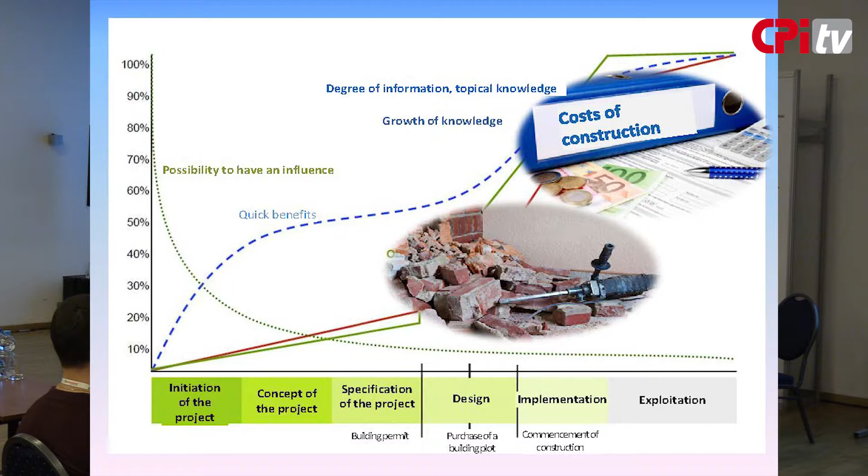We want to avoid very costly claims that arise when the buildings are already operating. We want to start with best practice issues, and we want to take responsibility at a very early stage of preparation of a precast product.

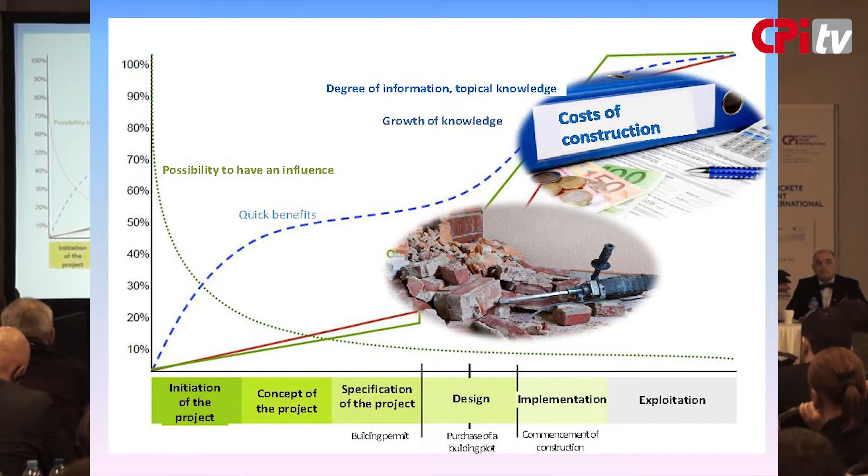We want to set rational thinking, ideas, and forward planning so as to design the precast elements properly. The planning is the most important issue for us in order to achieve the so-called quick wins, quick benefits. We have to start at a very early phase.

So, starting with the concept of a housing development, we need to set our thinking in the planning of the entire lifespan of a building. In our company, we have built around 3,000 houses within the last 15 years.

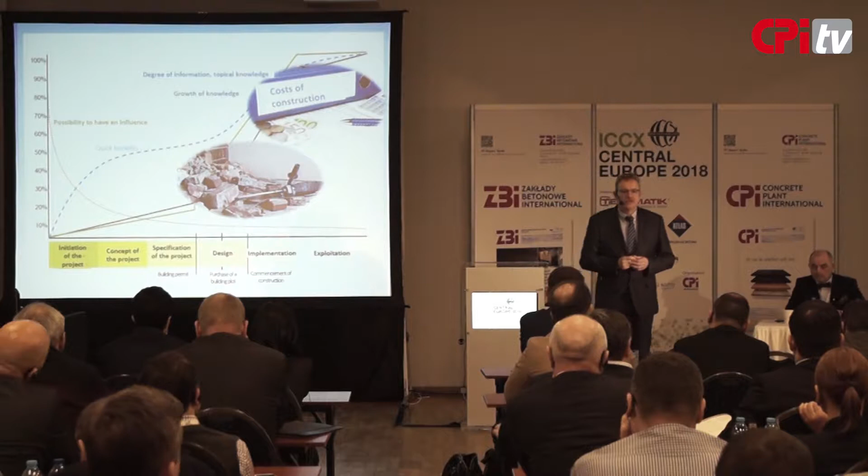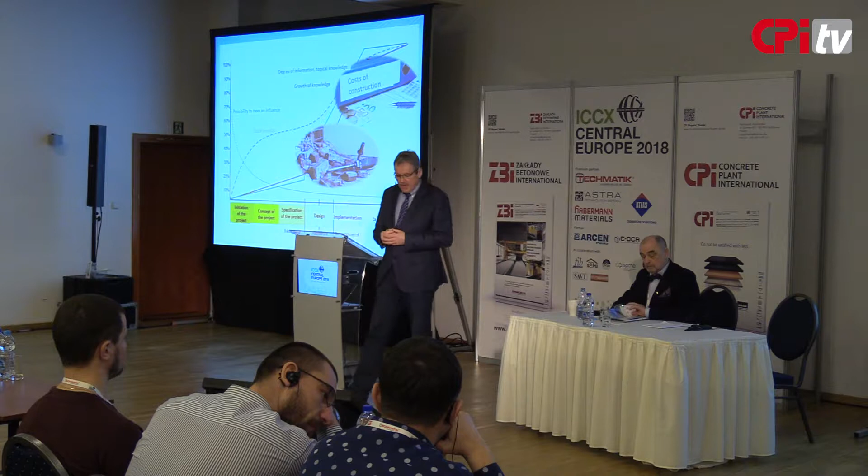And we know that the worst thing that can happen is when, during assembly, anything that has been omitted during the construction phase is discovered after it's been given away for operation. It is the most costly procedure. If we manage to eliminate that, it's going to be an enormous success.

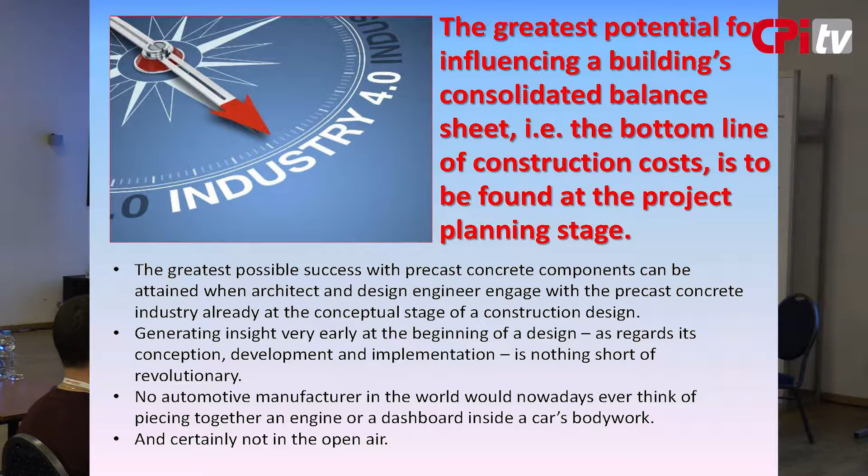On a normal construction site, for example in Germany, and I'm thinking about the construction of airports, you have to organize the construction work in a very detailed way. The elements that have been pre-manufactured are brought to the construction site and have to be appropriately stored. Per week we are assembling a certain amount of those products, and this has to be taken into consideration in the planning of the entire construction project during the design phase.

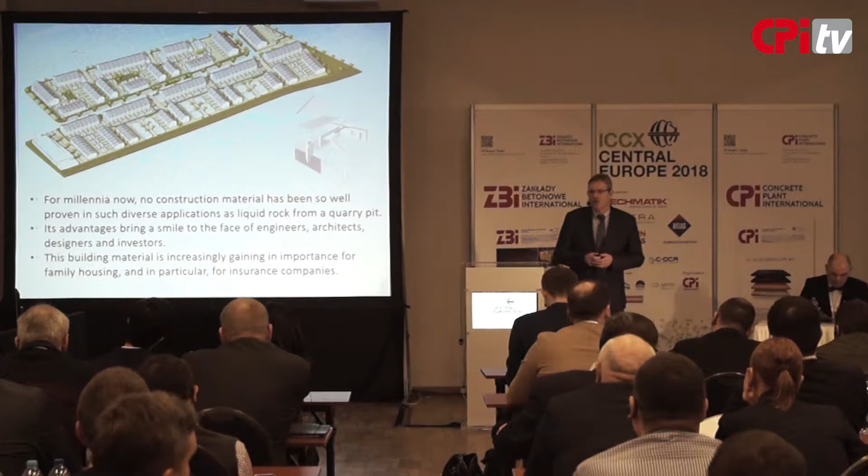Here you can see an example of a project with around 198 houses, and we had to plan the energy supply to those houses in advance. We had to plan it in a cost-efficient way.

Right now the people who live there give us a positive response concerning the savings, or the energy effectiveness, of those houses. That is, it needs very little energy to have it maintained per year.

What I'd like to add is that this project was situated around Frankfurt, and they are made of concrete. They have a functional division, and the massive elements made of concrete secure them from noise generated by the Frankfurt airport.

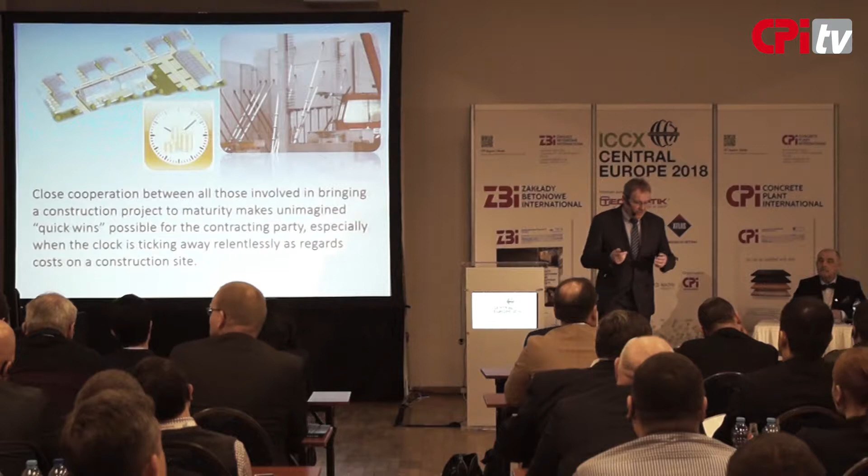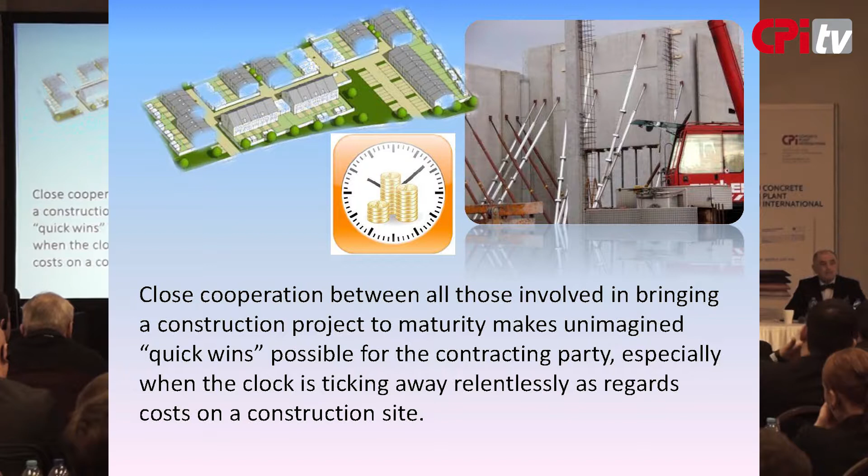Here you can see an example of a different building with a special assembly technique, and it is also something that influences the erection time severely. It has to be taken into consideration in the design phase as well.

I know that you are all already hungry and waiting for lunch, but let me say a few more words. You have to think about the Earth and how you treat our planet.

There was a period of fascination with liquid stone by the contractors and by the manufacturers. I am convinced that this material is a good one. I know that it's been used for the last 2,000 years, already in ancient Rome. I know that the Pantheon was made with the use of concrete without any reinforcement.

And this building has withstood several severe earthquakes and is still standing with practically no damage to its structure. So I am convinced that this material is useful also in the case of a need to assemble more installations in a project.

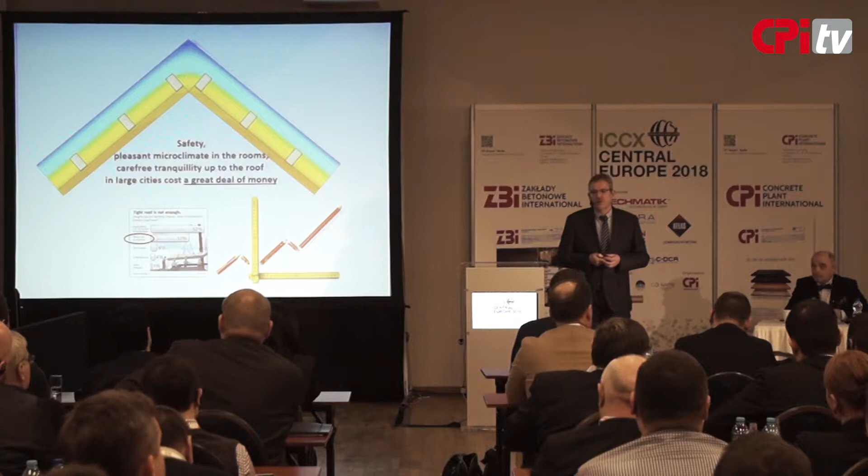The basic need of people is a safe home. Those homes have to be resistant to weather conditions. People are looking for safety, pleasant microclimate, and carefree tranquility in large cities, and they are ready to pay a lot of money for that.

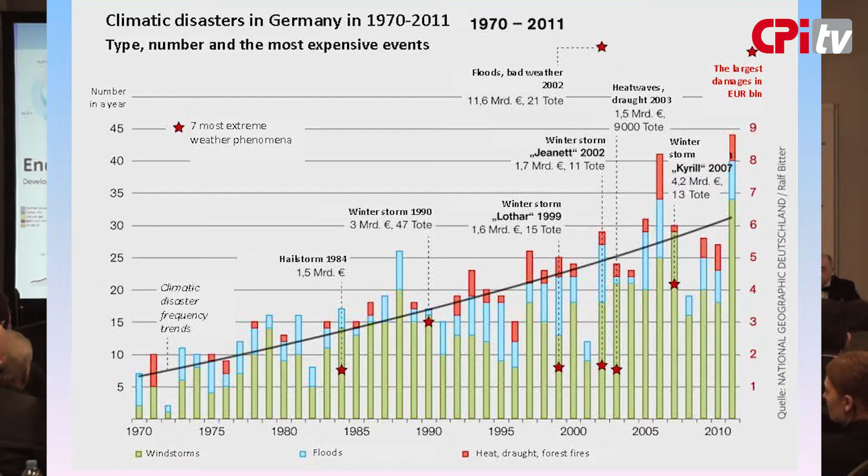Here you can see a graph on climatic disasters in Germany from the 70s up to 2011. Here you can see the energy use of mankind. As you can see, we use a lot of fossil fuels, and we generate huge problems with regard to this.

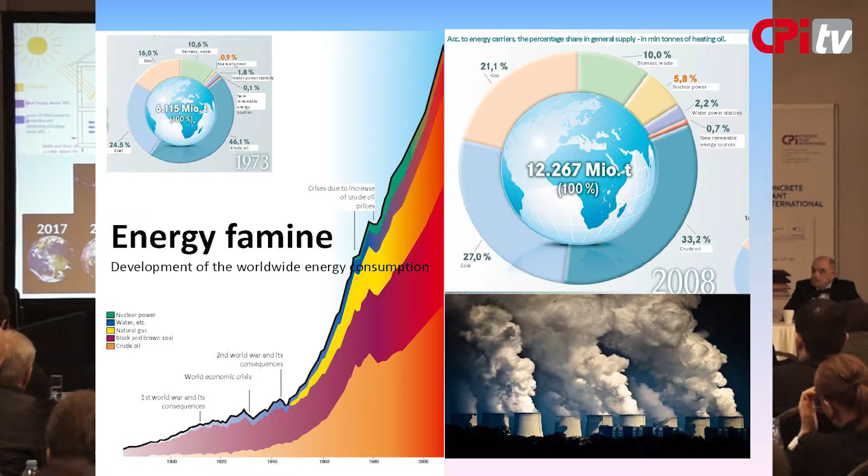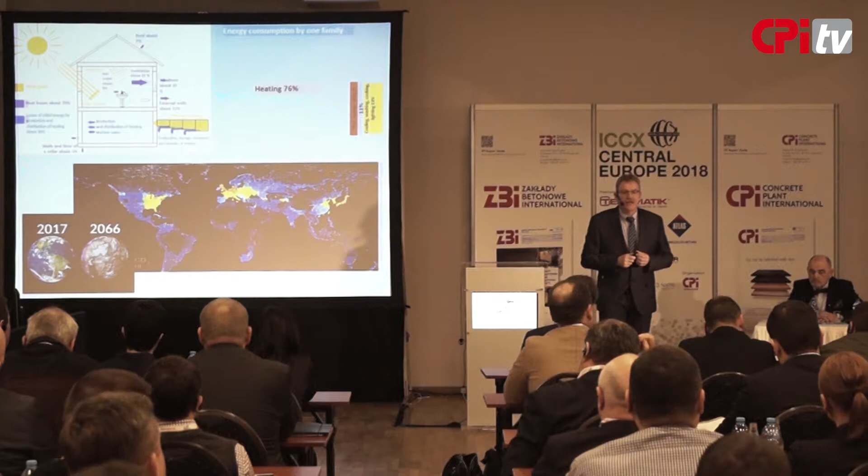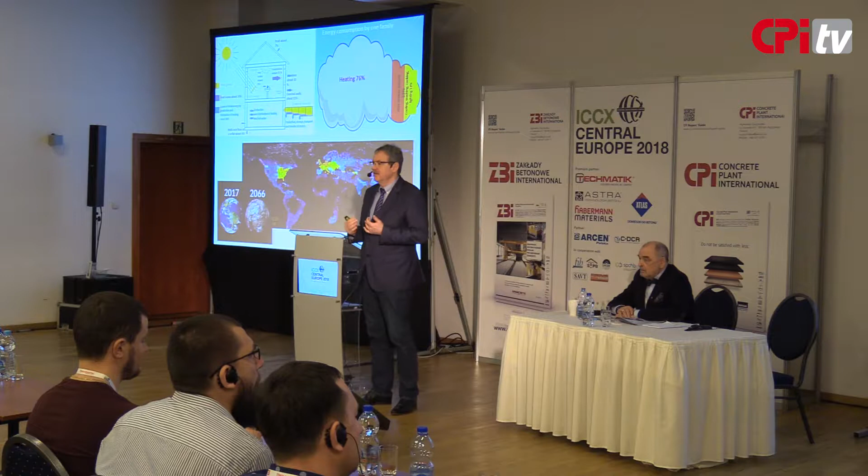Here we could also mention China and many other countries which pollute the environment severely, but we can also talk about Europe in this respect. When we think about our buildings, our housing developments, we have to think about the heating systems and the heat losses, the losses of energy, and the energy consumption produced by one family, which amounts to 76% for heating.

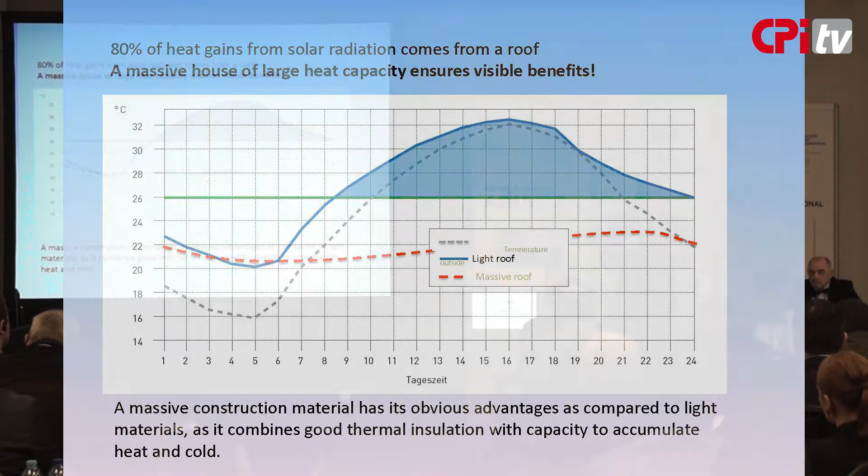80% of heat gains from solar radiation comes from the roof of a building. A massive house of large heat capacity would ensure visible benefits. If you could bring the cold generated at night to operate in the daytime in a house, that would also make a huge saving and a huge advantage to the environment.

If you can design the house in a proper way so that the windows are enough of a barrier for the heat and for the cold in certain times of year, that would also produce enormous energy savings.

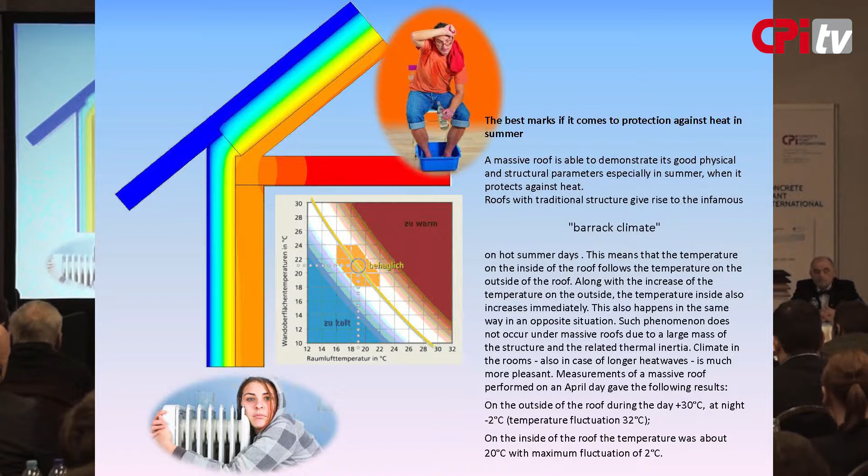We have a very small span in which a human being feels comfortable. You have to think about a proper air temperature, the proper floor temperature, otherwise a human being feels too cold or too warm. And you have to think about the exchange of air. So when you're thinking of a building, you have to think about the air exchange system, about the usage of windows if necessary, and you have to think about the proper material to ensure all those properties.

When we think about concrete, we know that concrete is not prone to fire. If we use it as a roof material, it also has significant advantages. That's a safety for the inhabitants of a house.

Also in terms of strong changing weather conditions, like for example storms or tornadoes, which also take place and happen in Germany and in other countries in Europe.

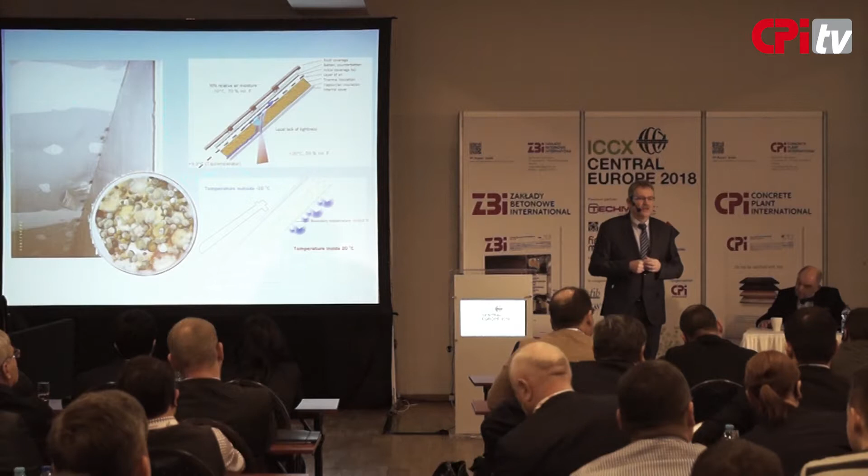Concrete has also great advantages, namely that after, for example, 20 years, it's not covered with any kind of layers that are produced by the environmental conditions. It doesn't smell. It doesn't take in any fragrances generated by the inhabitants of a house. It also has the great advantage that it's not insect or animal friendly. That is, there is little possibility for animals to start living in structures made of concrete.

Building from elements requires quick and reliable connections. That's also one thing you should take under consideration when planning the building developments made of concrete. You have to think about the joining elements so that you don't have to use severe equipment to introduce joints in difficult weather conditions on a construction site.

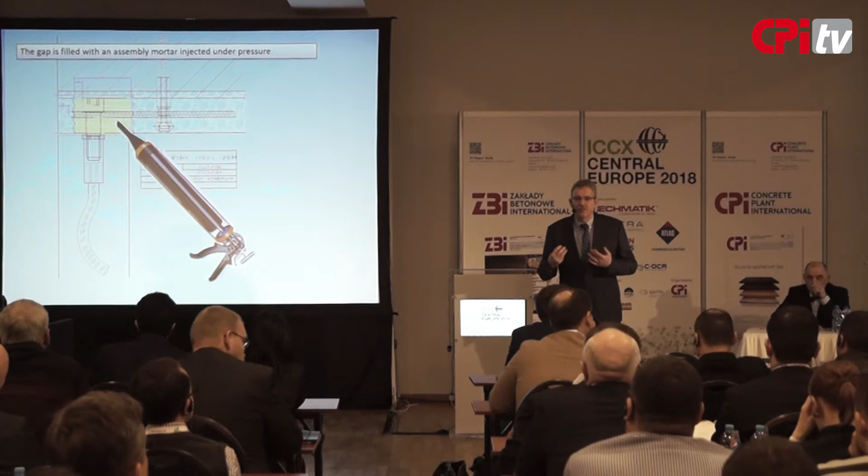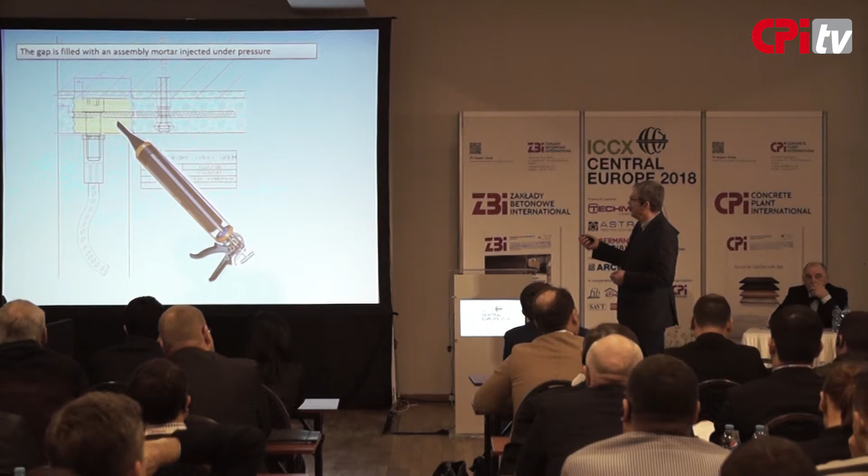Here you can see another quick way to join elements, and if you want to do it in a cost-effective way with relation to roof elements, you can use this kind of equipment.

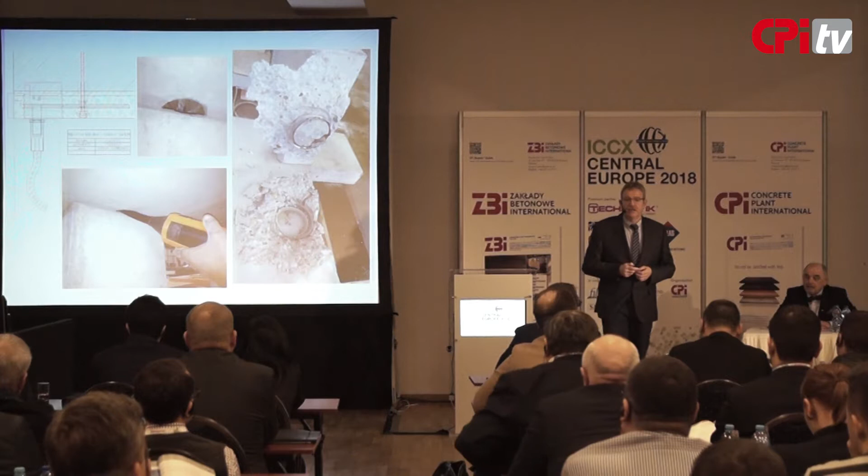The roof element is put on, and then when the building is already erected, you take a paste pistol and you put the material in the opening between the two elements, and so you quickly create a very stable connection point that can be reliable. Here you can see a roof.

Here you can also put window elements inside by means of the very same method. This is a very cost-effective method and a high-quality method of erecting one-family houses. You can take off the grids and build it in a way that I just mentioned.

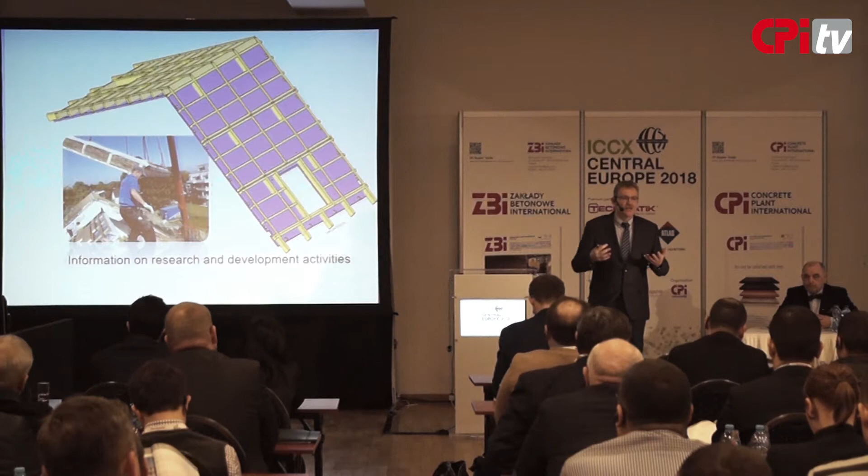In the next step, you introduce the isolation and the foil, and then the product can be transported to the construction site.

You can also work with reliable and sensible tolerances on site. As I said, it's a quick and pretty cost-effective way to execute construction projects in the scope of one-family houses.

When both roof elements are put on the building, we have an isolation band that comes on it, and it's screwed together with the roof element.

Here you can see a bit of research and development. We are testing those solutions, testing new joining solutions at our company's research and development department.

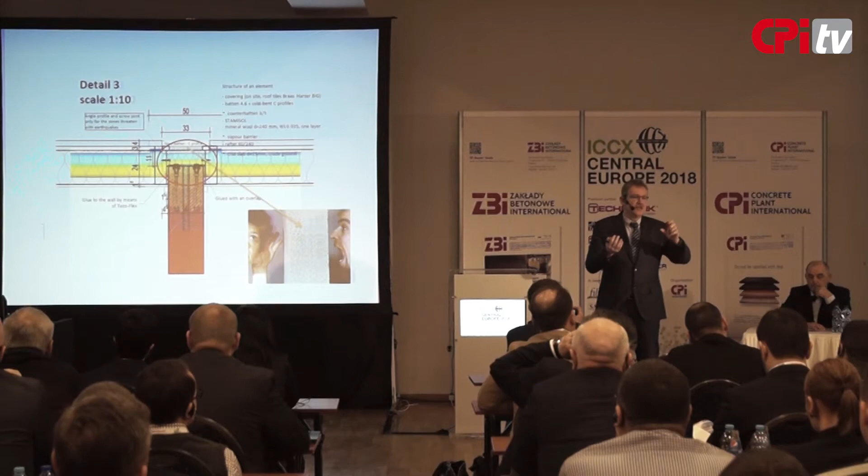We try to put precast timber elements into the concrete elements that we are using for construction purposes. As you can see, the 5 centimeter concrete shell is used in the case of this construction project.

Here you can see the prepared roof elements with the screw joints.

We try to develop all these solutions together with our customers. For example, if they need an isolation of 5 centimeter thickness, we try to check whether it's feasible, in a way that the wall is standing on a cold plate.

We have a 5 centimeter thick isolation, and the warmth bridge is being checked to see whether there is enough isolation and protection from temperature loss. This helps significantly reduce energy consumption.

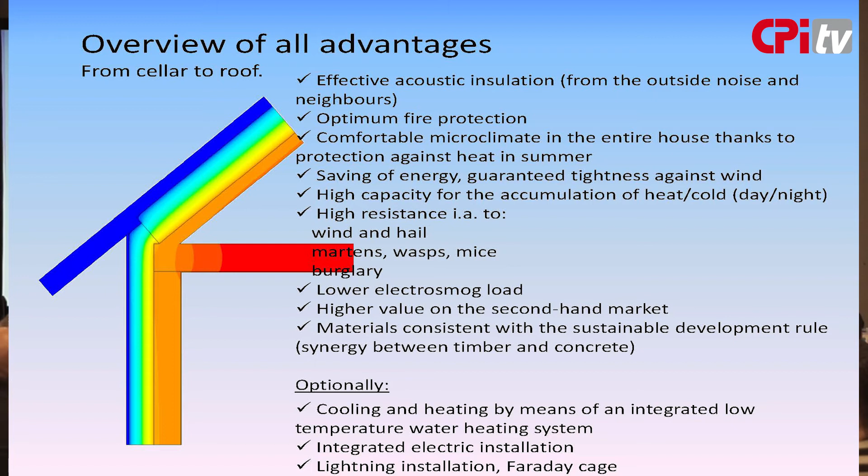This is the list of advantages of this method. When we have a house that we're erecting on site, piece by piece, it won't have all those advantages that we have when using precast concrete elements.

We have acoustic insulation from outside noise and neighbors. Then we have optimum fire protection, a comfortable microclimate in the entire house thanks to protection against heat in summer. We have energy savings, tightness against wind, and high capacity for the accumulation of heat and cold from day or night. We have houses that are resistant to wind and hail, and to martens, wasps, mice, and all kinds of animals.

And we want to deliver, by means of our precast concrete elements, advantages that they won't achieve with any other kind of material.